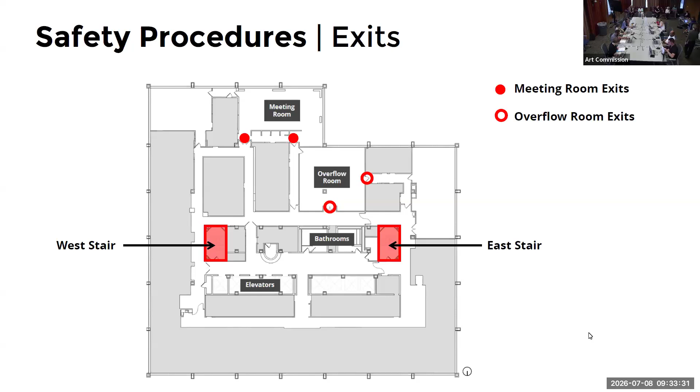Good morning, everyone. My name is Raed Nasser. I just want to wish everybody happy 250. This has been my 10th year on the Art Commission. I'm very proud of serving the city, serving this commission. It's been a great experience.

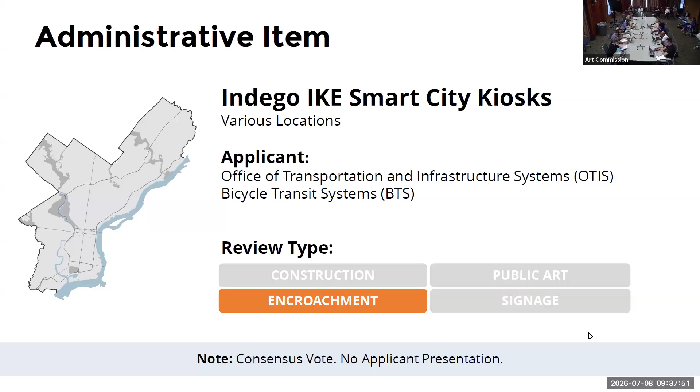Go ahead, Carmen. Yes, I have a question about the station at Kelly and Calumet. Based on the picture, that image, as you can see, there's a bike stand and then there's a bike station. I'm just wondering if two bikes touching each other is going to limit access for walkers, for people walking by. How narrow is the path going to be when there are bikes on both sides of that sidewalk?

These locations will additionally be reviewed by Streets as well, for complete street standards, as well as other issues, particularly access and utilities.

So can maybe a note be posted so that they look at it in more detail, so it doesn't get bypassed? Yes, we can add that note.

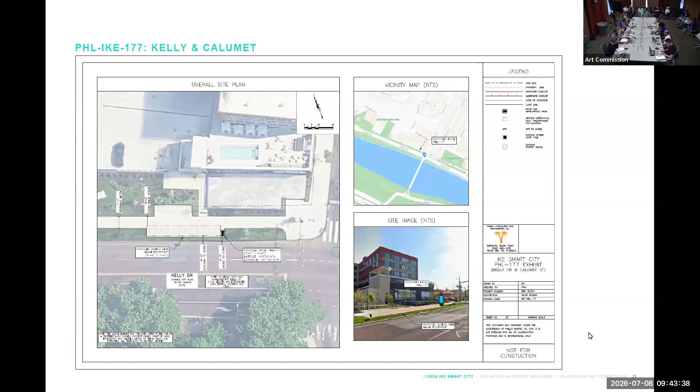Okay, it's okay, right here. Okay, right here. All right. Thank you. So, I'm sorry, go ahead.

Is this the appropriate place to talk about these criteria? I'm just reading it, and it requires community content to be endorsed by a city department and to carry that department's logo. Looking back at the examples, I'm not exactly sure where all these are coming from. I mean, some of them are things like residents' associations, which typically do collaborate with the city, but a small business having to get the endorsement of a city department or something—I don't know, it just feels onerous.

Just curious who the right people would be to shed some light on why these standards exist. Thank you. No, this is the first time I've read it—I don't know why I skipped it.

Yeah, we've never been given this before. Yeah, and further approved by the city. I mean, it's just kind of like—yeah, just as somebody that does events, it makes me think—I know we've done this in the past where we have a chart of the process, showing what it looks like and who talks to who at what stage.

Excuse me, if this is the process, I guess I would recommend there be some sort of guidance for people trying to submit content about how long they might estimate this process would take, so they can plan for that before they decide to submit something.

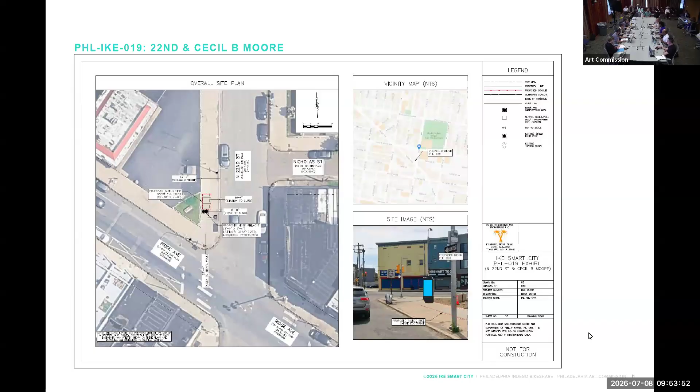Thank you. So our next item for administrative review is HVAC upgrades and exterior improvements to the John C. Anderson Cultural Center. Philadelphia Parks and Recreation with SMP Architects is requesting administrative approval of renovations to the center located at 5301 Overbrook Avenue. The project includes replacement in kind of select windows on the exterior and a new rooftop HVAC unit to replace the existing one. At the interior, there are ductwork renovations associated with the new HVAC unit, as well as ADA improvements to the existing restroom and new lighting and finishes associated with the scope of renovations.

The scope will have a minimal visual impact on the existing building. The construction budget for the project is approximately $3 million. Creative Philadelphia has determined that the project will not trigger a percent-for-art obligation, as the scope is largely HVAC and maintenance oriented.

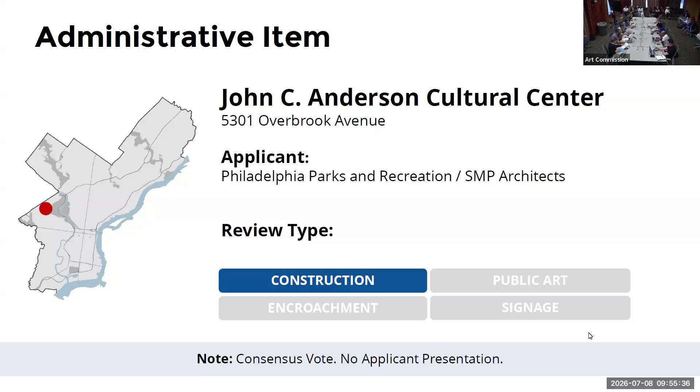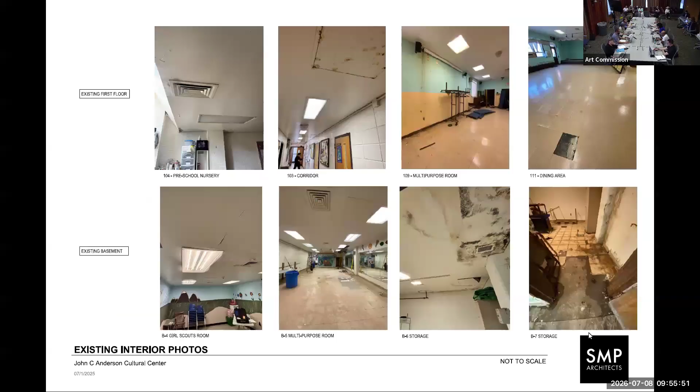Yeah, I'm glad they're doing a repair on at least the bathrooms. I did not know, I've been in this place before. Go ahead, just a clarifying question for legal around that.

I'd want to approve regular maintenance things, but is that part of the legal, or city charter, I guess, that if it's over $1 million, that's not maintenance oriented? Maybe I didn't phrase this question right. Is there a distinction in the law about how much money triggers percent-for-art depending on the type of improvement, or is it just any amount? Yeah, it's specified costs. Okay.

What are you asking for? Well, because they said it's $3 million for this project, but Creative Philadelphia determined that it doesn't qualify for percent for art because it's mostly maintenance oriented. So I'm trying to see, is that the way the law... Probably the evaluation that they did.

Good point. Yeah, usually it's... I feel like I've seen other maintenance oriented projects before, but...

How's everybody feel about that? Interior versus exterior, yeah. Did the team reach out to Creative Philadelphia to determine that? They did, because they wanted to ensure they were meeting the obligation if required. But due to the combination of budget and scope, Creative Philadelphia determined it was not required.

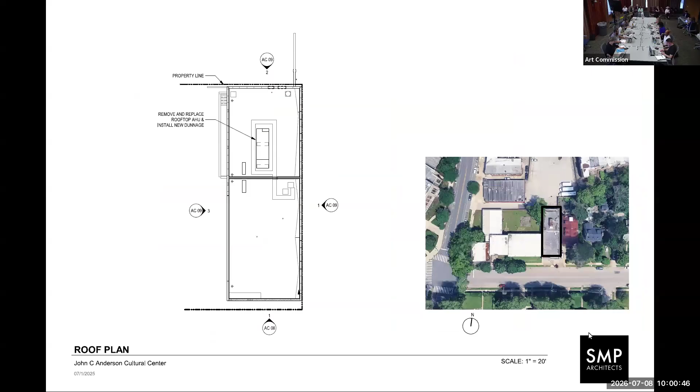Okay, next up we have the Avenue of the Arts Median Project, the proposed sculptures.

Good morning, my name is Desiree Jones. I'm the Executive Director of Avenue of the Arts, and I want to introduce our Ave Arts 2.0 project. We already had a successful ribbon cutting on June 24th, where the median is in place, and I welcome everyone to go down and take a walk and look at it. Now we're looking into our next phase with Miguel, and then installment of the actual art piece to bring the art to the avenue. Miguel is going to go into details on what that looks like for our final decisions.

Good morning everybody, good to see you all again. Thanks for having us. Thank you, Desiree. Also joined by our team members, Carl Dranoff, Chairman of the Board, Avenue of the Arts 2.0, and Tom Miles, who is part of the Arts Selection Committee I've been working with to develop this project. I'm really happy to come back with some physical samples, but also additional samples we produced to clarify the vision of the sculpture and what it looks like.

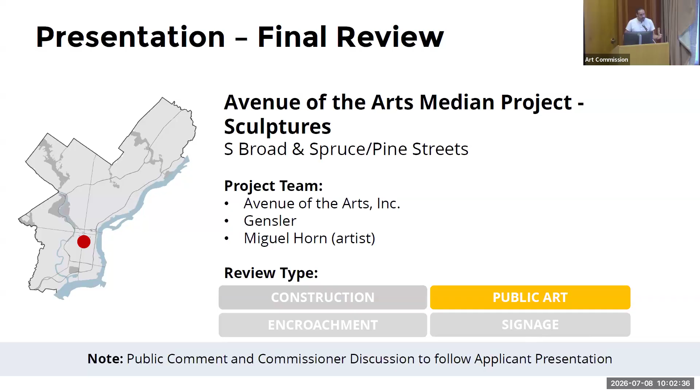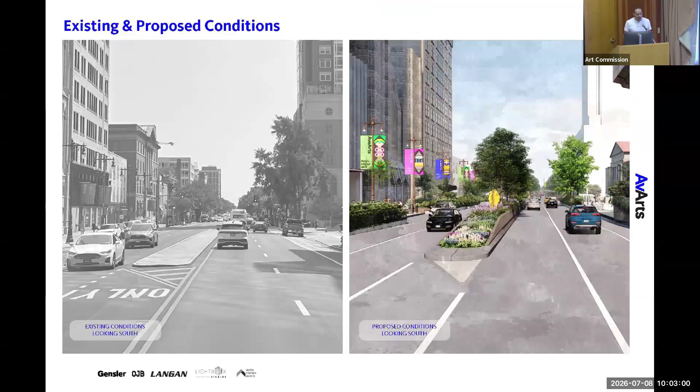So I'm going to skip through some of these other slides. We do have some updated close-ups that I think are really helpful for us to see. As context, you've seen some of these images. I think it's really great that we have the median to actually see now. That was really helpful for us in developing a mock-up, to stand in the space and see the sight lines, and be at eye level both as a pedestrian and as a vehicle.

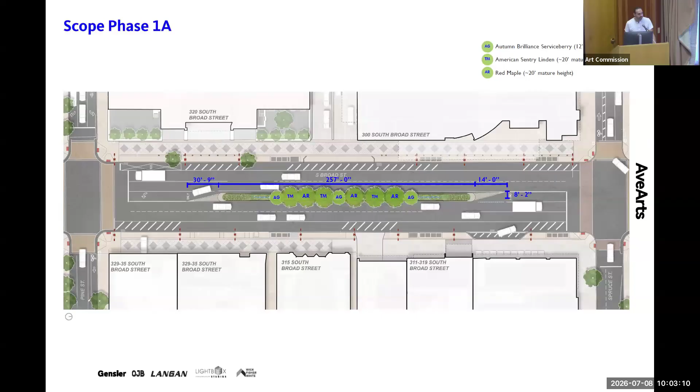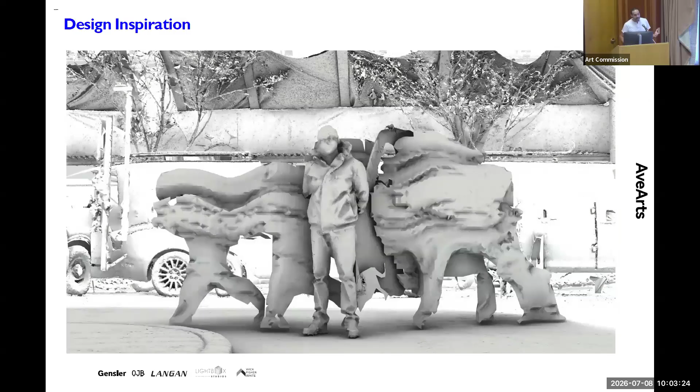So as you remember, we're looking at these abstracted scan data images that were processed into sculptural forms - kind of a stretch for the imagination. I appreciate why we needed to see some physical samples.

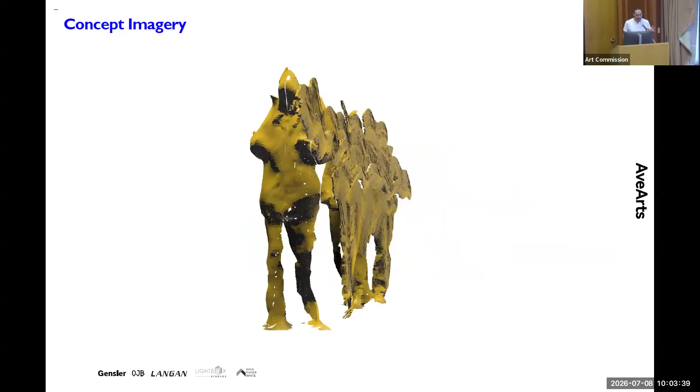So this is kind of that critical focal point, which I think we were all curious about, and how that would be seen. As best as I could describe it with words, I feel like they were falling a bit short.

I'm going to start with this material sample of the actual RAL 1028 powder coat. I'll pass this chip around. This is the mango color, the actual powder-coated surface. That's just a 16th-inch piece of plate. Multiply that times 3 and you'll get the 3/16, the same thickness I've been bringing.

Oh, is that not working? Oh, I shouldn't be perambulating too much here.

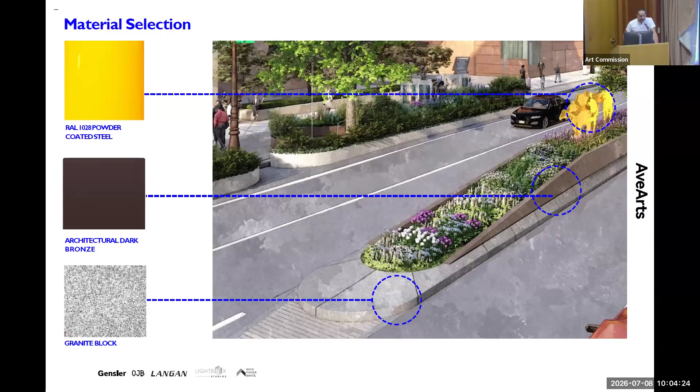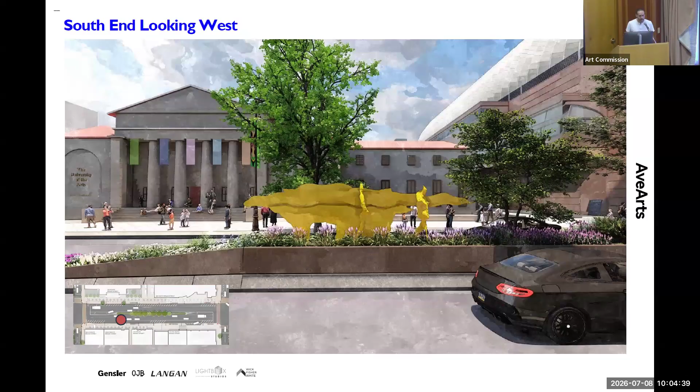We had these larger views of the context. OJB created a couple more close-up views so we could see it straight on, but also as if you were standing on the pedestrian spots. I've also updated a little legend in the corner showing where each of these images is taken from.

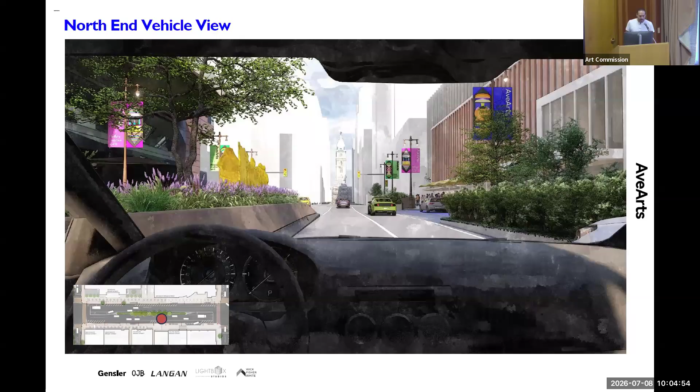Now, these are really beautiful images, but the greenery is a lot less dense at the moment than what we're seeing right now. I thought it was really helpful for me to take these photographs of the actual space.

I also went down there with Rebecca Siegel afterwards. We walked down to the site just to see it, and I stood in place. I saw a couple of photographs of what that looked like standing in place, and I thought, well, that's really convincing.

Just me as a person standing, pretending to walk across. So I thought it'd be really relevant to make a 1-to-1 scale mock-up, which I don't have with me today. It's kind of crude construction, but I think the images of it really do justice to this vision.

This is about a 5'9", 5'10" person that is part of the final scan data, translated into cross-section slices at a 3/16-inch step. This is made out of plywood, so it's finished with about as close a spray paint as we could match, to get the effect of the coated form.

I have a couple of different views of this where you can see it as you move around the form, looking at it from the anterior, from the posterior, from these kind of weird 3/4 images where it starts to break down. I thought some of these stills are really great for seeing how the form changes as you move around it.

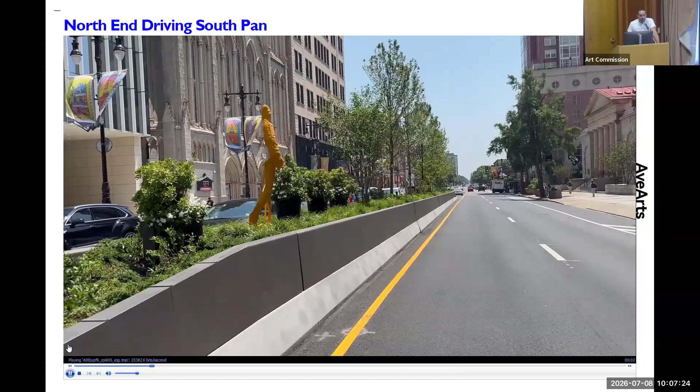So you can see as you approach that focal point - if I can pause right there - there's a moment where that sculpture becomes quite literal. That small focal point changes incredibly depending on whether you're a pedestrian walking slowly, matching the gait of that movement, versus a vehicle moving quickly across it. So the speed with which you're passing the sculpture dictates the amount of clarity you have in that time. As we pass back, you can see it devolves into this segmented topographical construction where it breaks down, because you're moving out of that focal range.

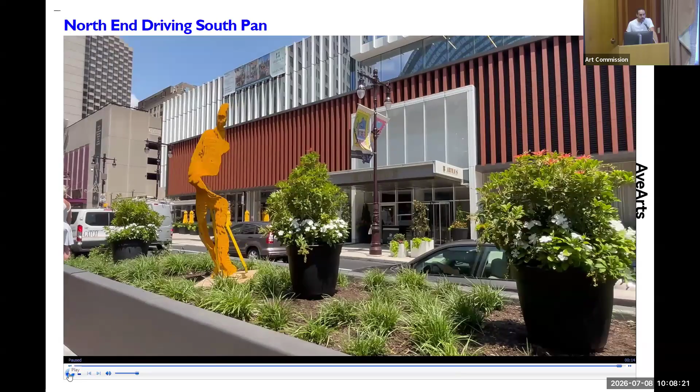Can I ask a clarifying question about this - how did you do this video? Were you walking? Yes. So this is a slower pan than if you were driving at a very slow clip. But it was a moment where there was nobody in traffic, so I just ran across.

And then I have a second pan as well.

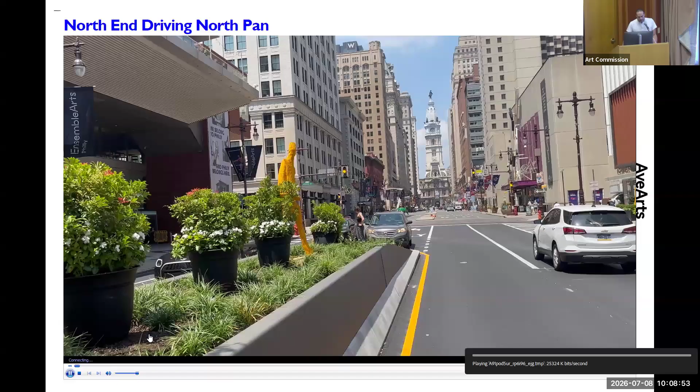So if we look from the opposite side, I rotated this so we could get the effect of seeing the interior of the sculpture, or the back side of it. You still get the sense of that silhouette as you're seeing what would be the negative shape, but it's just the opposite of the focal range, within shadow.

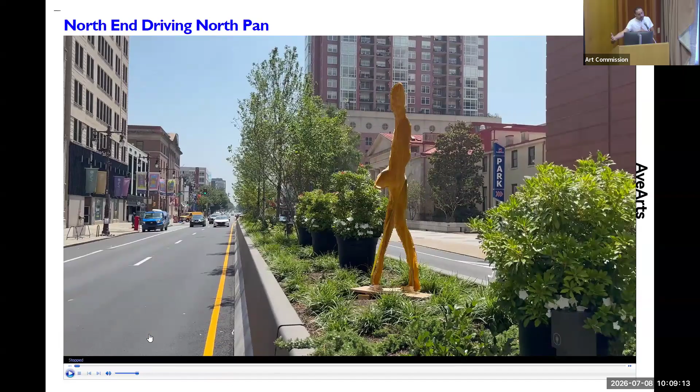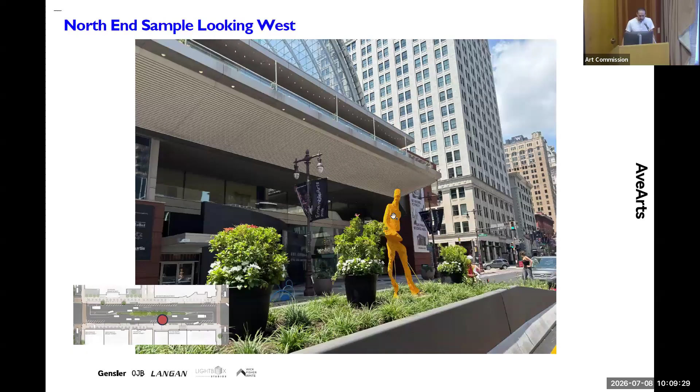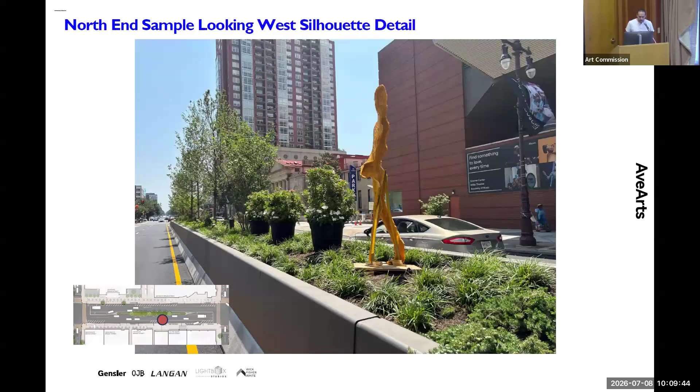There was a question about a detail of the stepping. I wanted to include the side and the front of the topography so you could see how light interacts differently depending on that orientation. Again, that silhouette effect of it kind of disappearing but having an effect on the other side.

And then I matched it up with some images, the actual physical model, with a scale comparison of how that would look. While it seems maybe quite large in some images or small in others, I actually think it fits quite nicely in the scale of this median, comparatively. You could see that physical sample matched inside there.

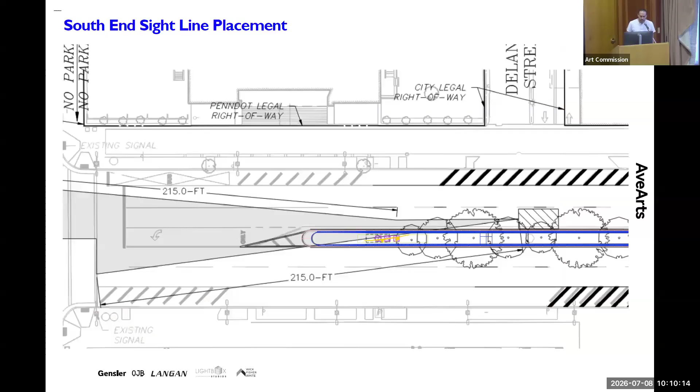Again, these all fit within the sight lines, the geometry. I did want to jump forward to our detail. Somebody asked about a detail of the connection. So essentially, depending on which pedestal we're looking at, there's a couple inches where the sculpture floats above the installed pedestal. These L brackets, these angle irons, go up into the sculpture and become welded into those quarter-inch plates, so it's braced in between.

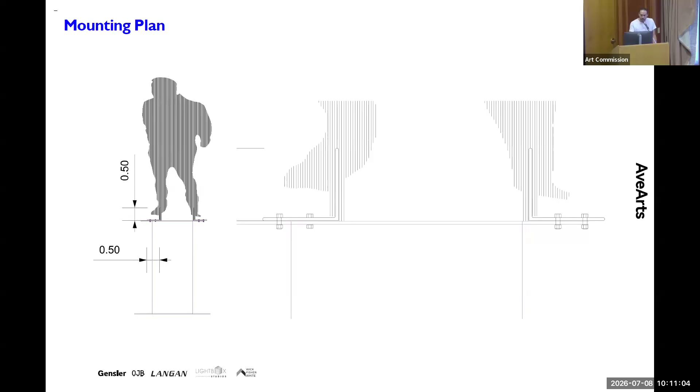Mechanically we can include some hardware, but we're going to be welding everything up. There will also be breakaway hardware which attaches to the top of the pedestal. And I believe those are all of the updates.

I just wanted to share these samples with you because I think this is really fun. You'll have to pass this around in a minute, but if each one of you can have a moment with this. Now these are just small samples, but there's one moment where, as you're passing by it, you get this little silhouette effect, the shadow outline of that person. Depending on where you're standing, you get a different effect - these are actually two people walking in different directions, so the effect changes with each one.

So this is the longer 25-foot construction. I tried to use the plywood as an indicator of the stepping and the topography, to see how those forms would move. This is the smaller composition with this long tail. Unfortunately the feet on this one broke off because they were so small - it's tough when you're machining little sections like this, but I think they're pretty fun, and a challenge to put together. I thought it was a nice one for you.

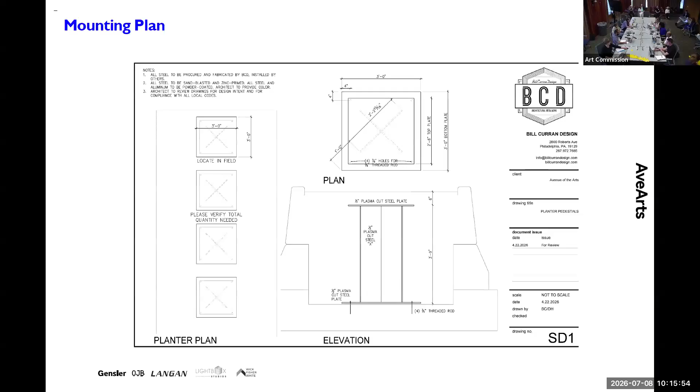Any comments? Just a quick question. I'm looking at south and looking west, so UArts is behind. I don't want this to sound like I'm picking apart your maquettes, your models, but I was curious - if I'm holding up one of these that you brought today, aren't they more relief? Or is there more relief?

So this is just the long stretches. The reason I made these was as an example of the kind of really abstract shape look. And then the physical 5-foot model - I didn't bring that in because that was too much. But that would be sort of attached, they connect to those. Yeah, so they're kind of extruded out sections that also have the same tie down to the base.

So each one has two kind of static, singular forms that are connected to it. Okay, so I just wondered if I had misinterpreted it to begin with, but we're good. Got it.

Hi Miguel, how you doing? I think the concept is great. And the way you explain it, I see it in my mind and I can imagine moving around the sculpture and it constantly changing, going from sort of a flat surface to a more three-dimensional surface.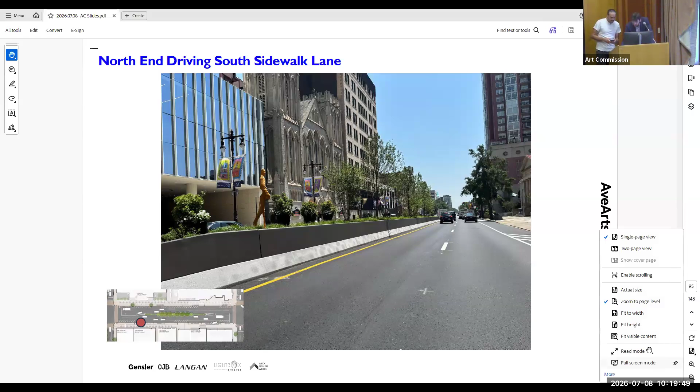So just while you're doing that, if I can clarify your question - are you asking if these striations occurring in his slide can actually translate into physical form? Yeah, I was just pointing out the difference between the slide and the model, it's showing two different things. Well, if this is made of plywood, right? Yes, and the sample that we made, they were both made out of plywood. This is a 3/16 plywood, so it's the exact dimension and step. And I can go back to one of the details, but...

Part of why I'm bringing this up is that, one, I have seen other works from him and I know it translates. But the other thing is that just touching this model, because it's made of plywood, it's brittle, it's not internally solid or consistent. So to do that it would just look like a mashed mess, probably.

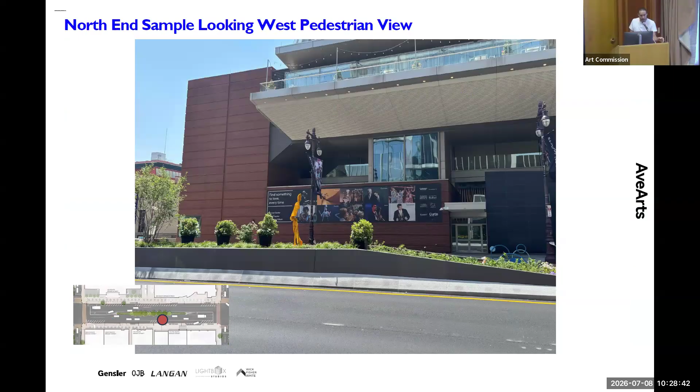And that figure is part of one of these larger pieces, right? You just installed that figure as a mock-up, correct? Yeah, and I'm quite clear on that. Specifically, if you look at this slide, the render has this actual figure in place where it's standing. Thank you.

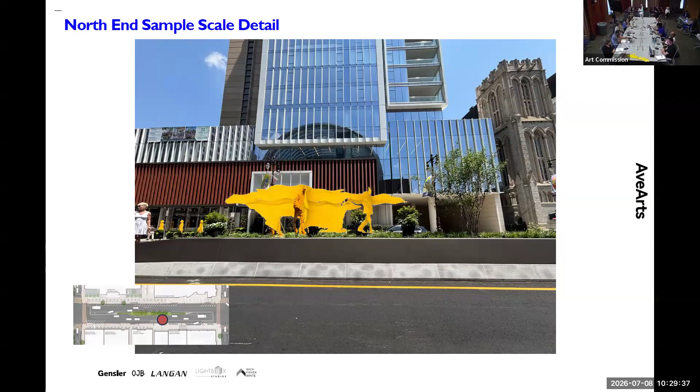Yeah, I have a quick question. So when is phase two set to begin? Because building on what you were saying, connecting back to the last meeting, and also why I asked how you filmed this - the temptation to get close is real, and the culture of being in medians is real in Philly. I think we need some deterrence in some way to protect the piece, but also pedestrians. I have no notes about the sculpture itself; I'm mostly thinking about its context and user experience. So when would this be installed if we approved it, and how soon does that occur with phase two?

Good morning again. We're working on phase two. Phase two would be the sidewalks, and that would be more of a deterrent for people to cross into the street. So phase two will prevent the actual crossing of the street. So you're in that phase right now? We're in that phase right now. We partner with PennDOT - it's a state road, so we have to coordinate conversations with the city and the state to move on to phase two. We're in that beginning portion right now.

Okay, that's helpful to know, because one thing I'm scanning for is whether there are poles or something in parallel where this sculpture would be installed that could give pedestrians that sort of info - where they are in relation to this. Because you've shown us a few times this experience of once you cross a certain plane, you catch it and you're like, oh my gosh. So at that moment would be the ideal place on the sidewalk to have something that gives them the information or satisfies that curiosity, I guess.

So we're going to have information about what's happening across, but those are the long-term plans for the whole AveArts 2.0. This is not just a one-day meeting with us - this is going to be for the next few years, from Market all the way up to Washington. I'm just thinking, Dr. Matt is referring to this sculpture experience versus the whole one.

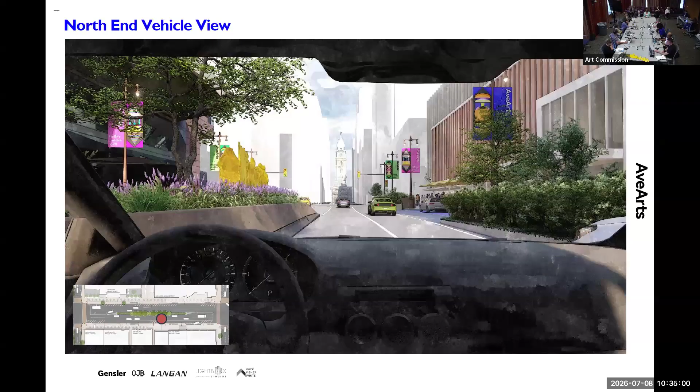Remember the whole overall tree-lined boulevard—we are getting these giant green strips on both sides of the street, with plantings and beautification. It will involve lighting, irrigation, signage. We've even met with Larry Magid and the Music Alliance to detail where the plaques are going. It's pretty intricate. So in a perfect world, we would start in the spring and complete it by the end of the year.

So that's what you're talking about—next year? It's not years in the future. It's next year if all goes well.

Yeah, and if we go ahead, we would have identification. We would want to give Miguel credit. I think people are going to love it and they're going to want to know, well, what is it? Who did it? When was it done? All that will probably be on a raised plaque, and probably on QR codes somewhere—wayfinding and signage is part of our plan. So this will all be integrated in, and we're thinking about that.

The reason I'm asking is that typically we do see labels with sculptures, and this doesn't have that. So my craving for information is probably going to be a lot like the experience of the users, the people who are encountering it.

If all of this is part of phase two, that ideally would be in front of us to weigh in on alongside this piece, but if it's not, that's fine. I was just asking about when this might be installed, and if it's part of phase two, then great—the other components we've been asking about could be expected to come before us again as part of phase two, I guess.

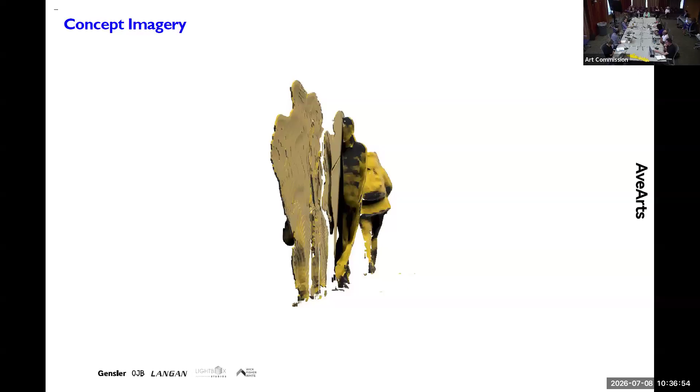If it does get delayed, then we'll go to plan B and have some type of identification. We don't want people walking out into the street and being in harm's way. I'm thinking about the content creators that are going to want to go into this median, so it's all in service of trying to make sure this is well taken care of and protected. I feel great about this.

I think if we were moving forward with approving with the conditions that there's identification on the sidewalk, and that there's some sort of maintenance plan or stewardship conservation plan. We've already mentioned graffiti is happening on the median, so we need a way to know what plan would kick in to restore it if it were damaged by something like that. But that's where I'm at.

I think handling that was fast. The maintenance part of the graffiti, especially on the sculpture, will be very important. Avenue of the Arts is in charge of maintenance, so we'll be on top of it. Awesome, thank you.

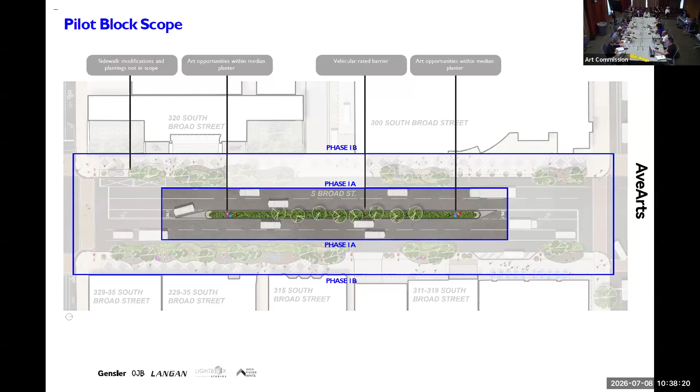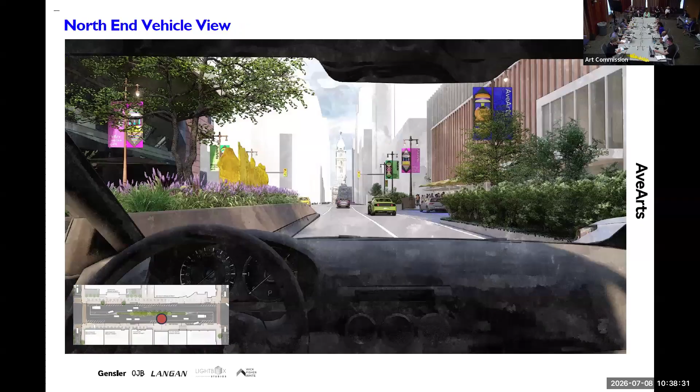All right, so how can we do a final? Oh, definitely, yes, I moved to do a final. I think that Dr. Matt added, making sure that there is enough information if it's going to get delayed, that there are plans to provide information the moment the sculpture comes up. Maybe even something temporary that isn't like the shiny plaque.

We do have plans to do a temporary one. That's why I was talking about the planters. We have some planters there that we're going to put a QR code on temporarily to show what's coming, because people are looking at the planters wondering what belongs there. So we talked about adding more information now currently, and we're working on that.

That's nice, so that shows them the second phase too. So they're getting a little preview of what's coming? They'll give them the preview of the sculpture.

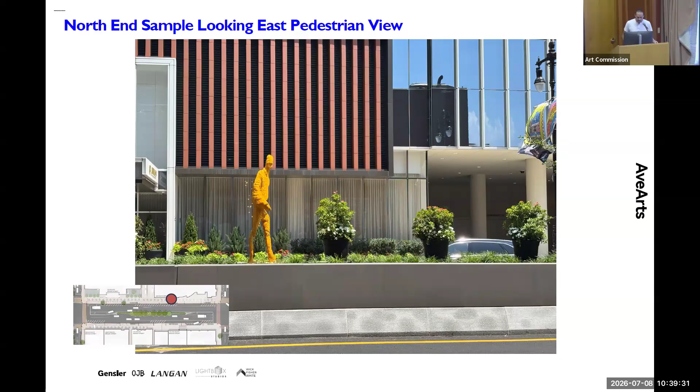Now, if I go back to some of these renders, you can see that space right over here—this is that pedestrian view from the Kimmel Center. So on this existing pole, we can have an aluminum printed QR code.

That's exactly what I was getting at. We can do that—is there a pole nearby with a good view that you could just put something up on? A couple planters too—there's a few planters here right now, we could put them on the side of that. I think that's an easy one we can tackle.

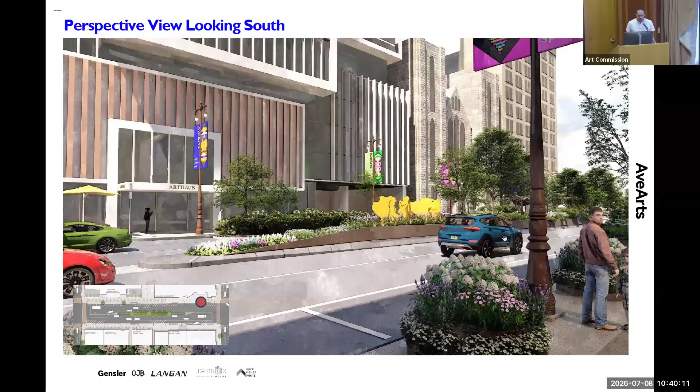On the south side as well, I think there's definitely a pole on the other side we can find—via a good spot for it.

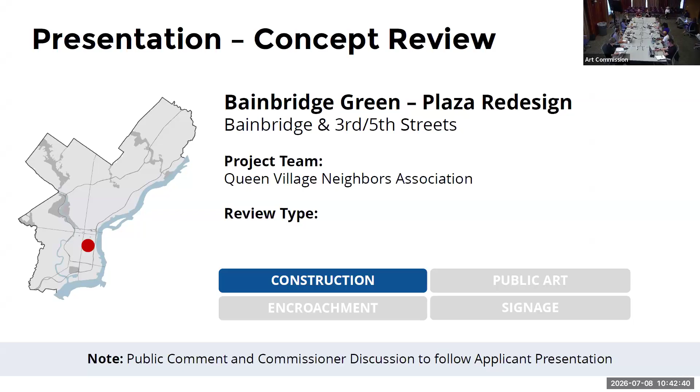Good morning, everyone. I'm Lauren Leonard, working for the Queen Village Neighbors Association as project manager on the reimagining of the Bainbridge Green Plaza, which is that median strip between 3rd and 5th on Bainbridge. This is Brian English from Green City Works, the architect who did the conceptual drawings that are part of this presentation. We're here for conceptual review, so we'll walk you through it. We're looking for your comments to make sure that as we work towards construction drawings, we're detailing the right things so our L&I review process is as seamless as possible.

Where do you want the next slide, or you? Sure, do you want to see here? Sure. So this advances.

Okay, good. So here's the project team. DCED provided the funding for this. Queen Village Neighbors Association was the recipient. With Green City Works, which is really a part of University City District, we presented a conceptual design for community review. That's as far as we've taken the design process so far. Brigolage Management is the project manager, and Friends of Bainbridge Green are the stakeholders.

QVNA was recently awarded $366,000 from the state to renovate this park based on the conceptual drawings we provided. Bainbridge Green is located in the heart of Queen Village, at a critical intersection between South Street and Fabric Row. What we've determined is this is an unusable space for the public—the sidewalks are unsafe, the soil is sterile, and the trees are really struggling and suffering out there. So we wanted to make it a space that's welcoming to neighbors, creates a safe place for people to spend time, improves the horticultural aspects, and preserves the tree canopy.

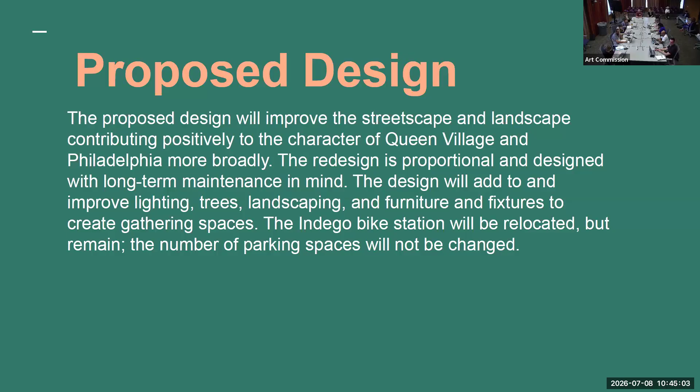Our proposed design is to improve the streetscape and make it usable for visitors and pedestrians, as you can see in the concept here. We're proposing to remove some of the problematic trees, replacing them with a greater number of trees. There are some great mature oaks and sequoias there—we'd want to limb the canopy a bit to keep them from splitting apart and keep them going, and also introduce native shade trees and understory trees to inject new life into the canopy. The soil itself has no oxygen and no nutrients in it, to the point where weeds aren't even growing in certain areas, so we want to regenerate the health of the soil and preserve that canopy.

We're proposing to remove the sidewalk on both sides where it's heaving, raise the curb up to the proper elevation, and create a boardwalk strip that meanders through the center for pedestrians. It will be ADA accessible. We're not changing the footprint or the use of anything, really just making it so people can safely navigate through. There's some bollard lighting to illuminate the footpath throughout, and where necessary, the boardwalk will circle around trees so there's no interference with the existing canopy.

We're proposing a hardwood like Cumaru or something similar that will last for decades. Flanking the boardwalk would just be softscape—native softscape. We don't have a planting plan or palette specifically to present, but it would be a combination of native grasses and perennials.

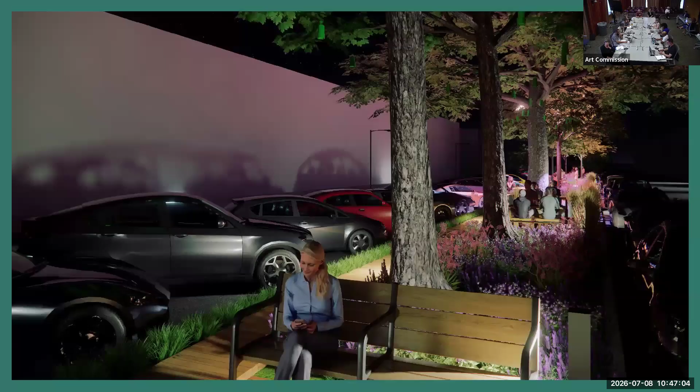We have benches, picnic tables, and planters proposed, but we haven't specified materials yet. These are the early suggested materials—these benches, there's no commitment to this, but it's presented as part of the concept. The bollard lighting on the bottom right would be for the pathway.

Councilmember Squilla, Representative Isaacson, and Saval have all been on board with this. Squilla, I know, has been a very big supporter of this project and wants to see it get made.

There's been numerous meetings, and maybe Lauren, maybe you could talk about more recent activity, the numerous meetings with the different stakeholders.

Sure, so I am also relatively new to the project. I live in Queen Village. I was a former QVNA president, actually. So this project, I was out of the neighborhood for about 7 years. So this project has kind of come a long way.

There have been multiple community meetings since January 2023. Our most recent meeting was actually last Wednesday, where we shared these plans and talked more conceptually about what was happening. There is broad neighborhood support for this.

This strip has long been an issue for neighbors. It does not work well for anyone. There's not really a way to walk down that strip. If you try, you're contending with the sidewalk and also cars. And as was mentioned, the way they can pull up now really encroaches on what would be for pedestrians.

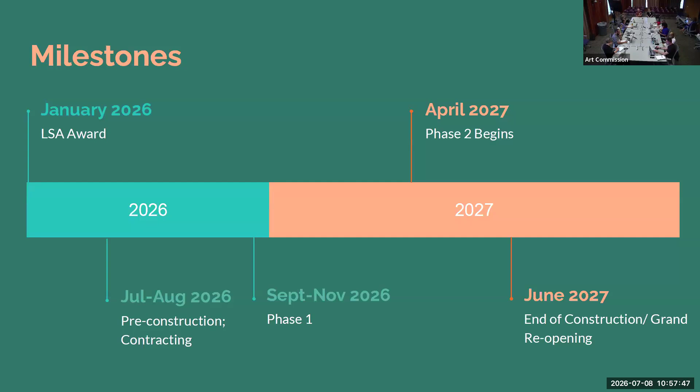Sorry, I got something on my screen. I don't know how to get rid of it. Oh dear. Okay, I'm not used to trackpads.

So showing that—especially if we're able to cross at 4th Street, how do we cross at 4th Street? And knowing people will cross at 4th Street even if they shouldn't, even if it's not approved by the Streets Department. Is the fountain at the end of 3rd Street part of the scope as well?

It will be maintained, it is part of the footprint of the project. I know from the Friends of Bainbridge Green it is currently not working. There are some community efforts to try to get that working. Generally speaking, there is a water concern here about how maintenance can be provided.

We have not considered irrigation. I don't think there is budget for that, but a robust watering plan will be part of our bidding process. My intention, once there is a contractor on board, is to check the fountain—what else can we fix that's been here forever and just isn't working? So no changes to the fountain, but there is a desire to make sure it is working.

And there are some kind of questionable planters next to them. There are—we have talked about the questionable planters. As you can all imagine, there are some real neighborhood attachments to some of these fixtures. Part of the process as we work towards detail is finding those places where the architect and our professional consultants are making the best decision for the future of the project, based on what we need to be in compliance with and where there are opportunities for neighbors to continue to participate in ways they've participated for many generations. So there are some questionable planters, and we will determine what is a replacement and what is still a community access point.

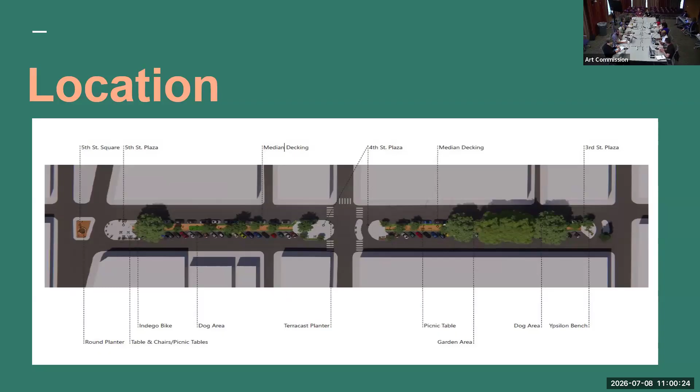Sure. Another concern, looking at some of the renderings, is that the path meanders a lot, and that's of course great for discovery, but I'm also concerned about the 90-degree angles—people will just trample the plants. Thinking about paths of least resistance, and it also looks like some of the street furniture makes you move maybe a bit too much, so just in consideration of that.

I also share concerns about the boardwalk. I think it's really an interesting palette, but I'm not quite sure how you intend to do that, and about the longevity. Do you have examples of where you've done that before that have stood the test of time, as far as a similar grade-level application?

We don't specifically have examples with those. We have some areas we've done with Ipe tiles, but we no longer want to use Ipe, just for sustainability issues.

But we've seen projects where 20, 30 years later, the Ipe looks great. The latest material we discussed was Cumaru, which was supposed to give us the same lifespan, but further investigation needs to happen on this.

We have the Ronald McDonald House, a green roof we did out of Ipe tile, and it's 10 years later and it looks fantastic. It silvers a little bit in the sun. That's the limit of my experience, but we need to bring in other expert help for that — a different application on a green roof than on a street surface. We want to avoid making this concrete.

This notion of a boardwalk is compelling, just in the way people think about it and how you'd maneuver and meander across it. But we need more exploration into materials, both in terms of cost and maintenance. This area isn't truly a pedestrian pathway at the moment, so snow removal, salt, and all of that hasn't really been a consideration because it hasn't been a viable pedestrian path. What we're proposing opens it up and invites pedestrians, so there are different considerations as it relates to what materials go down and how they're maintained properly.

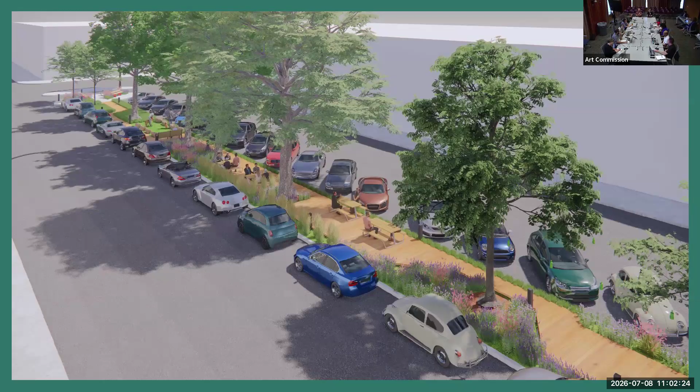There's still a lot to determine in terms of what fixtures we're buying, what the approved specs are that we need to follow with Parks and Rec, and where we have opportunity to create other types of interventions. I think we would probably not have a singular planter like this in a final design. Also, there are traffic considerations here — some of this effort is to make sure that when you're on these end caps, you feel safely ensconced and can sit and enjoy your time without concerns about where the car is. So this rendering in particular would be more filled in.

There are budget constraints, and we anticipate there may be phases where it is so far more bare than we'd like it to be. Phase 2, phase 3, etc. would contemplate additional interventions. These slides were really provided for fundraising purposes and community engagement purposes — there's a lot of blanks to fill in. I think that's what we're here in front of you today for, to make sure we're pointed in the right direction. Thanks for turning it over to the architect.